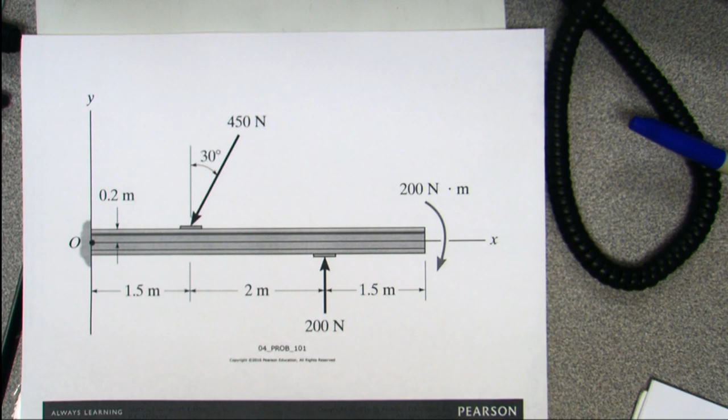Basically what we're trying to do is replace the loading system on the beam with an equivalent resultant force and a couple moment. And the couple moment that we're going to do is about point O.

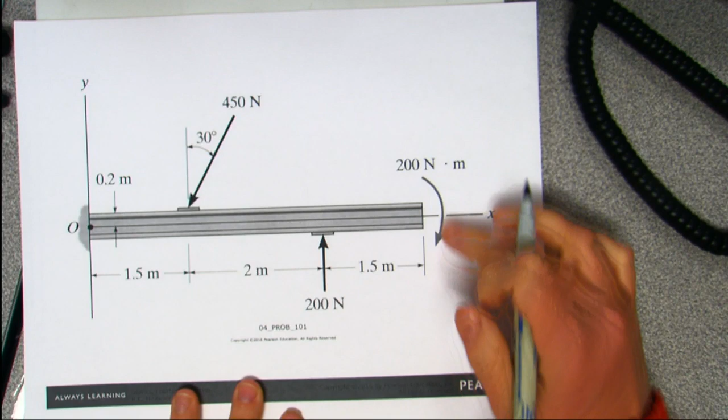Alright, so we've got a beam, and what we're going to do is replace the forces with a resultant force, and then we're going to find the moment, the couple moment, using that about point O.

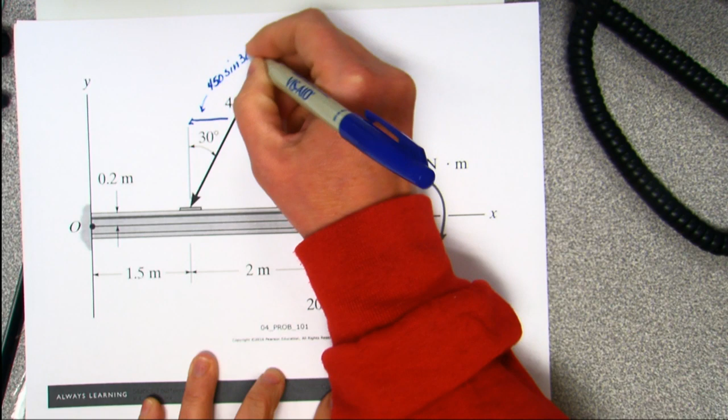So the first thing I would do is get the components of the force. This component is going to be 450 sine of 30 degrees, which equals 225 newtons. I'm going to get the y component, which is 450 cosine of 30 degrees. If I plug that into the calculator, that's going to be 389.7.

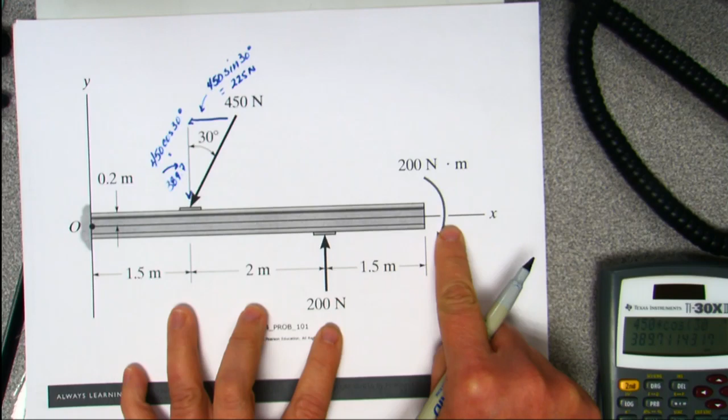This one's only in the y direction, so life is good. And then we've got this one here. So we're going to have to look at this a little differently.

So the first thing I'm going to do is sum the forces in the x direction. There's only one force in the x direction, and it's going this way. The magnitude of it is 225 newtons.

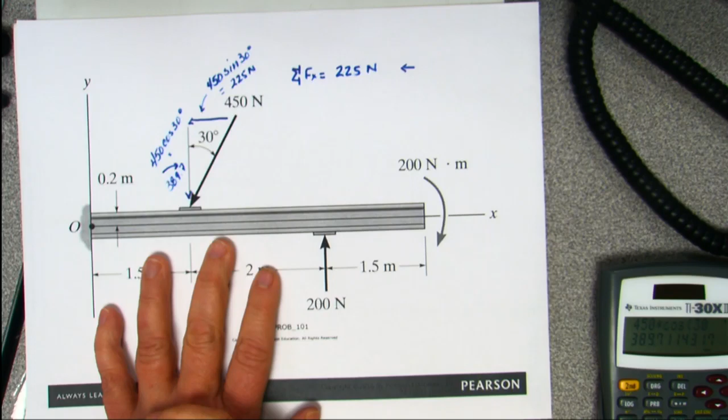The sum of the forces in the y direction, I've got 200 going up. I have 389.7 going down, which is going to give me a downward one of 189.7.

Now, I didn't do that with signs, I've done it with arrows. So if you're doing it in mastering, you got to kind of figure those pieces out.

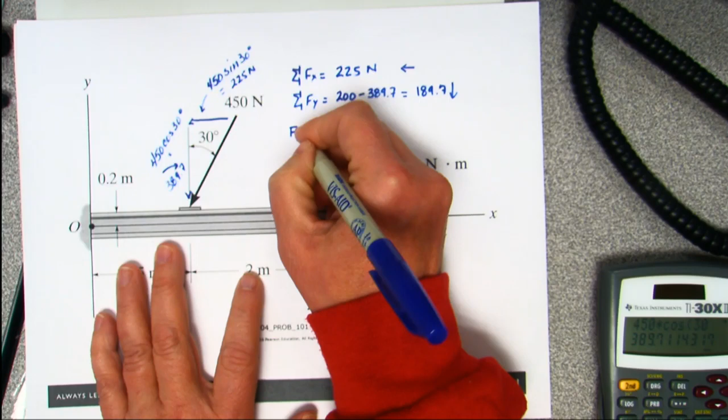Which is going to give me a resultant force of the square root of 225 squared plus 189.7 squared. And that was going to be minus, but that's okay, we've got it recorded in the right spot. It's going to give me 294 newtons.

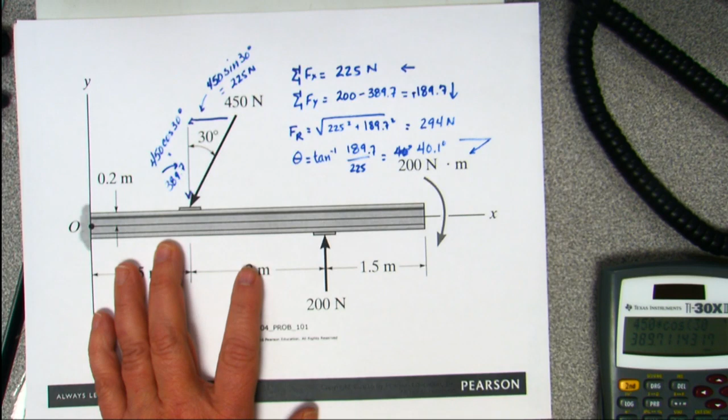And my angle for that force is just going to be the arctangent of my 189 divided by my 225, which gives me a 40.1 degree angle, and that has it going this direction. So we have the angle in there from that direction.

Everybody okay with the resultant forces on that beam, based on the forces? Good? Okay, so now if I want to do the moments...

This is the moments about point O. I've got a 4, now this is one of those things you got to catch in the picture. Look where my force is here. Okay?

So here's my moments. I've got the 450 in the y direction coming down, it's my 389.7. Okay, 389.7. And it's 1.5 away.

I'm going to put it as negative because this is going to have me go this direction, right? In the Y. This is for the Y component. It'll have me go that direction for the X.

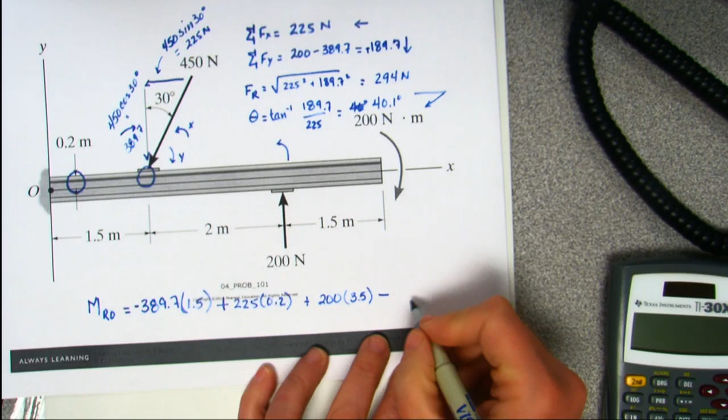This one has me going that way, so that's in the right direction. So it's going to be 200 times 3.5. Then this one's in the negative direction, and it's already a moment, and it's 200. I don't have to worry about the distance because they've already given me the moment.

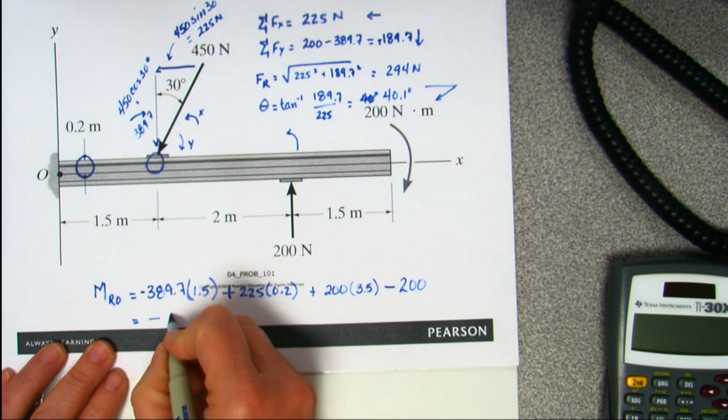If I add those together, I should get a negative 39.6 Newton meters, which I may put into the system as 39.6 and just showing it as that direction.

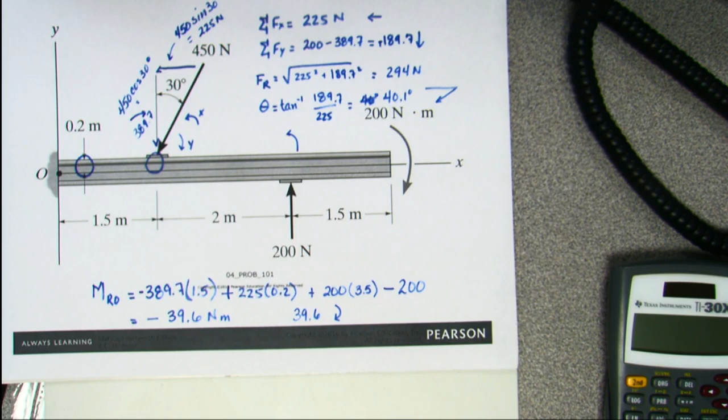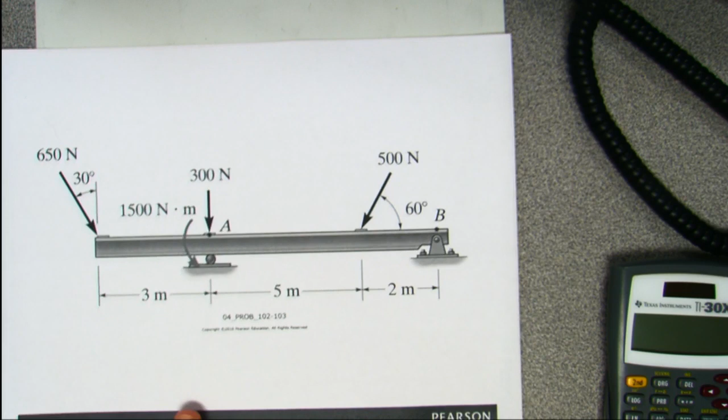Will we start distributed loads on Wednesday or Monday? Monday we're doing the presentations on fault analysis. That's right, so it's gonna be on Wednesday. And I think I've got the homework all straight, right? Distributed loads homework's not due until after spring break, is that correct? Yeah, because I think I got it all moved on Wednesday. And distributed loads won't be on the test next Friday. But doing something like this, being able to write the resultant force or the resultant moment, is likely to be on the test on Friday.

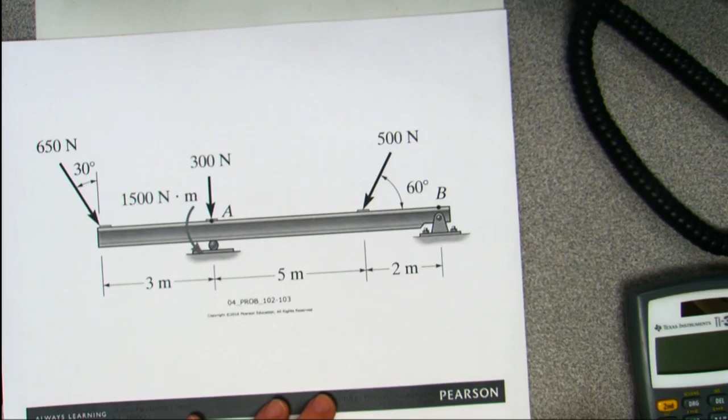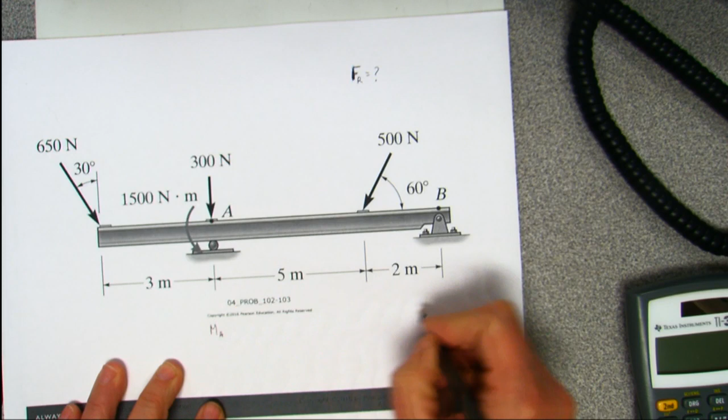So you guys want to take a stab at it and then have me work on it? So we want to find the resultant force. And then we want to find the equivalent moment, the equivalent moment about A, and we'll ultimately do it about B as well.

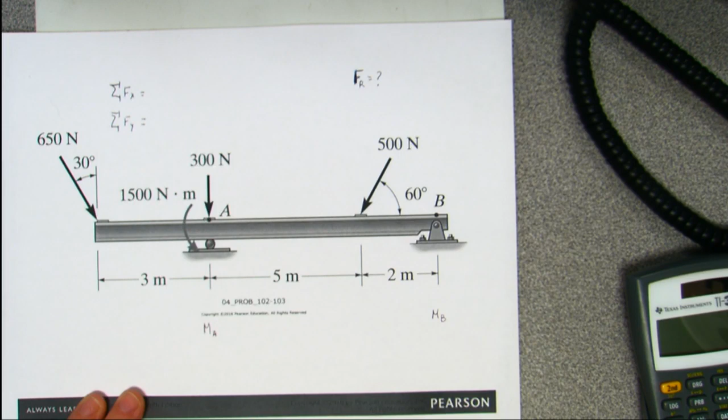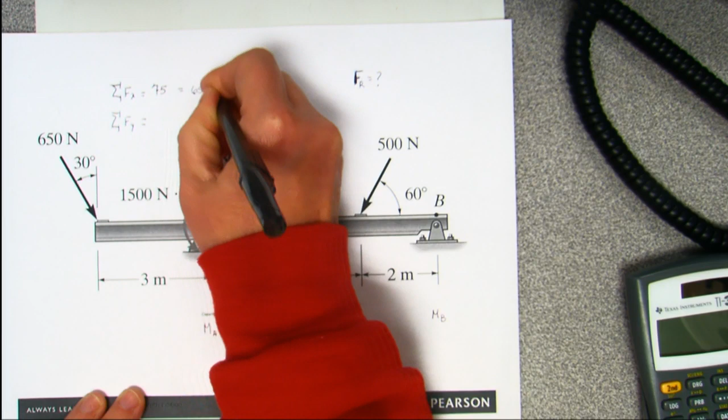And everybody got sum of the forces in the X yet? Positive? Yep, what'd you get? Positive 75. Yep. And that's coming from the 650 sine of 30 degrees, and that's that direction. And this one is that direction minus the 500 cosine of 60 degrees.

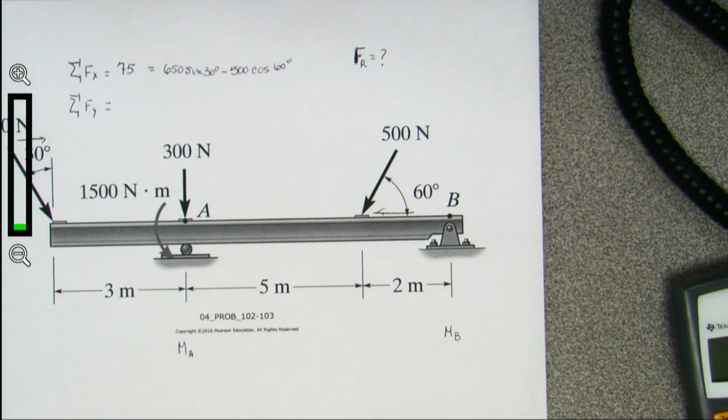Yep. Your pen is a little bit hard to read from me. Yeah, I know. But I've got either a really bad marker or I've got the marker that died. How's that, better? Yeah, that's a little bit. Yeah, I don't have a good marker.

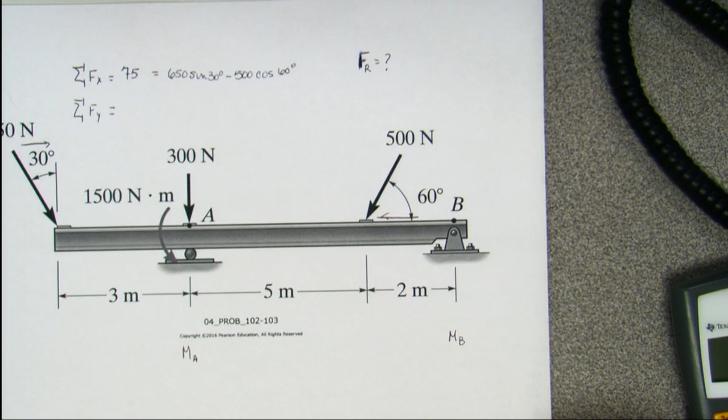I know where to go, A and B. Somebody get a Y yet? Negative 1295.9. Yep. And that comes from this: a negative 650 cosine of 30, negative 300, and a negative 500 sine of 60. Everybody good with that? I got nods. This is positive.

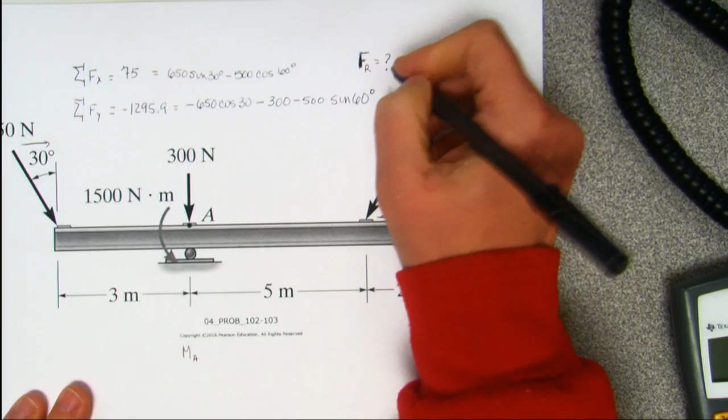So now the resultant force is pretty straightforward, right? It's just going to be the square root of 75 squared plus 1295.9 squared, which is going to work out to be 1298, or about 1.30 kilonewtons.

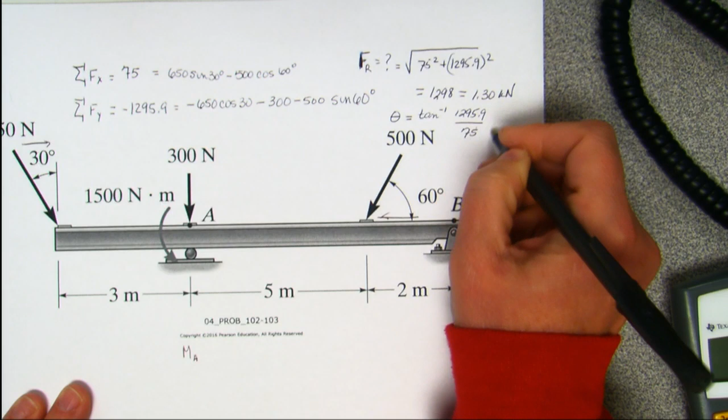Good, Kyle? Yeah, okay. And then the angle is going to end up being the 1295.9 divided by the 75, and that's going to give us an angle of 86.7 degrees, and it's going to go that direction.

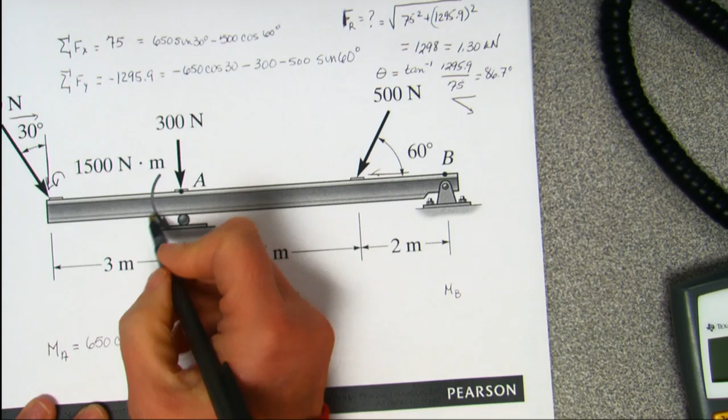So I'm going to get the 650 cosine of the 30 degrees, or is that right? 650 cosine, yeah, cosine 30 degrees, and that's 3 meters away. And that's going this direction here, so that's going to have it go in the positive direction. They give me my 1500, that's in the positive direction. And then this one, I've got it going that way, so it's going to have the negative.

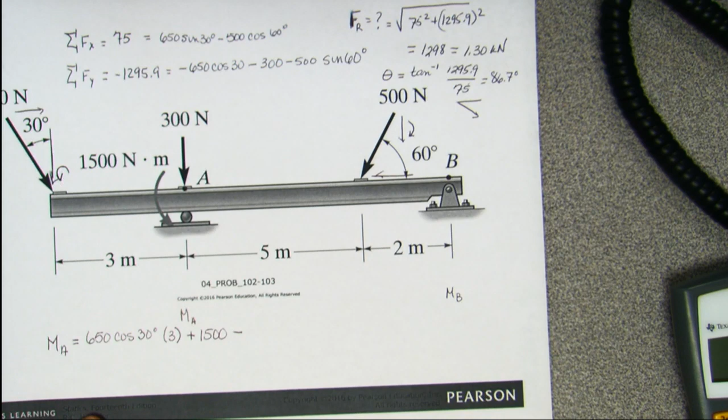I think we've got a question here. Should our 3 be negative since it's going in the— Nope, it's 3 away. We're accounting for the direction here. And then it's the negative 500 sine, yeah, sine of 60, and that's 5 away. When we plug all that in, we end up with 1023.

Now, Brandon, if I put the negative 3 in there, I'm going to end up in the opposite direction. Yeah, I was just wondering, because if we were taking the moment at A, I didn't know if we would make that negative, but I see what you're saying. Yeah, it's just, you've got to keep track of it based on how our convention is.

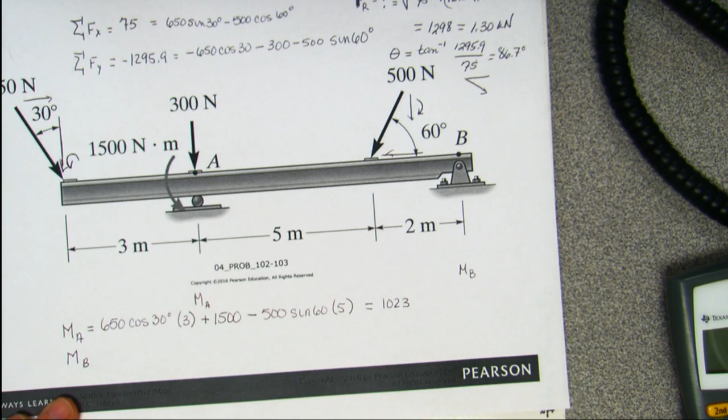And if I'm doing it about B, this now becomes positive, this one becomes positive. This room, we lose the lights, because I'm not in a position to where the motion detector is in this room is a little different.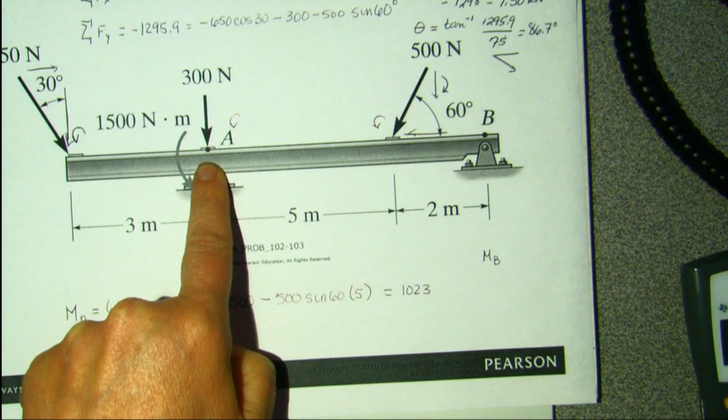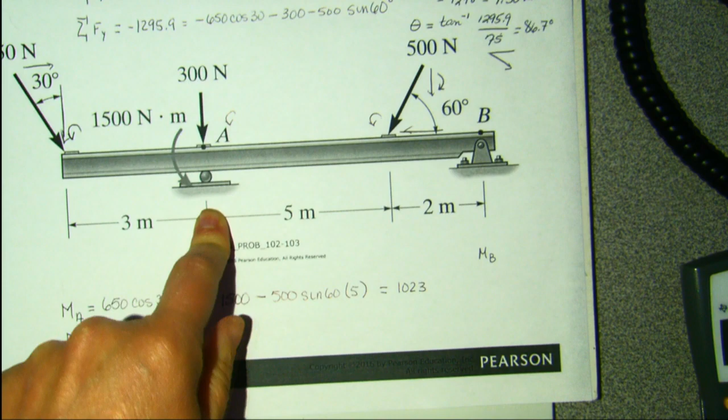So this one—does everybody see why we don't do the 300? Why don't we do the 300? Yeah, because it's on the point that you use. Yeah, D is equal to 0. It's on the point, which we use to our advantage going forward. We're going to use it to our advantage.

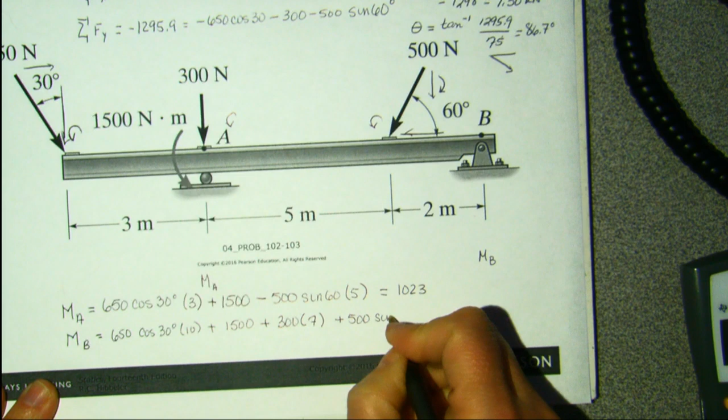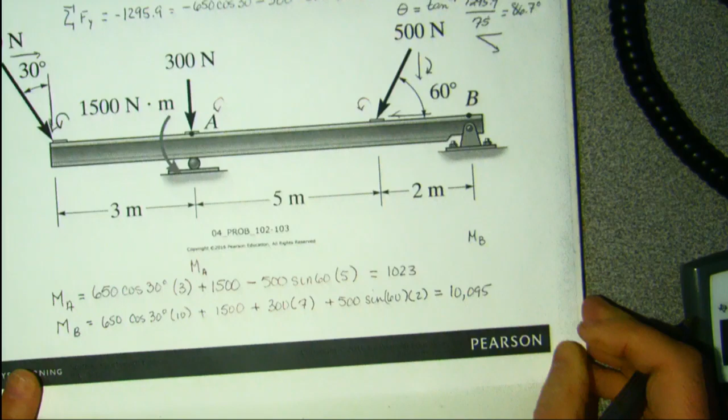So now all of these are going to be positive this time, so it's going to be 650 cosine 30, except now we got to do 3, 5, 2 is 10. We have our 1500, because that's how we represent things. We have our 300 at 7. And then we have our 500 sine 60 at 2. And that one's going to give me 10,095. So we can represent this as 1.02 kilonewtons, and we can represent this as 10.1 kilonewtons.

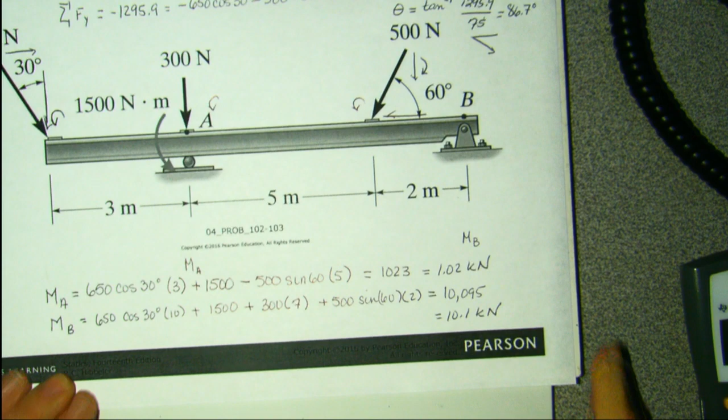This one is problem 102 and this is problem 103. But the forces are the same.

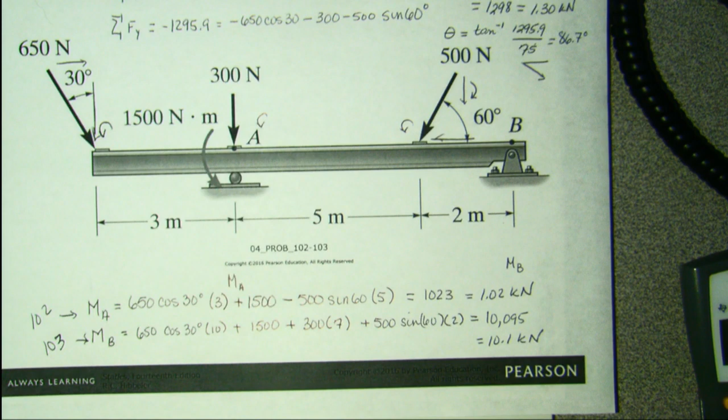Is this making a little more sense, guys?

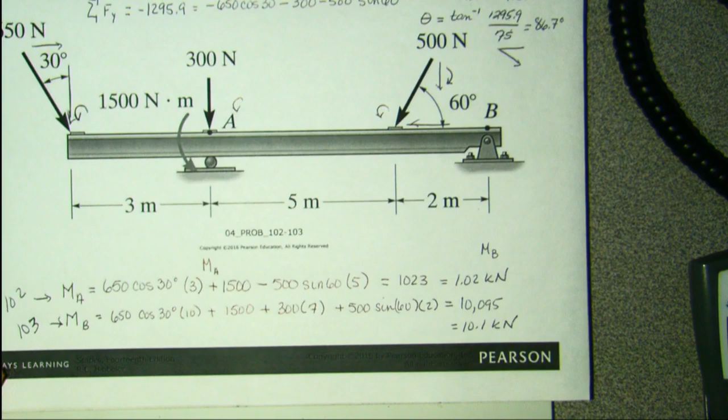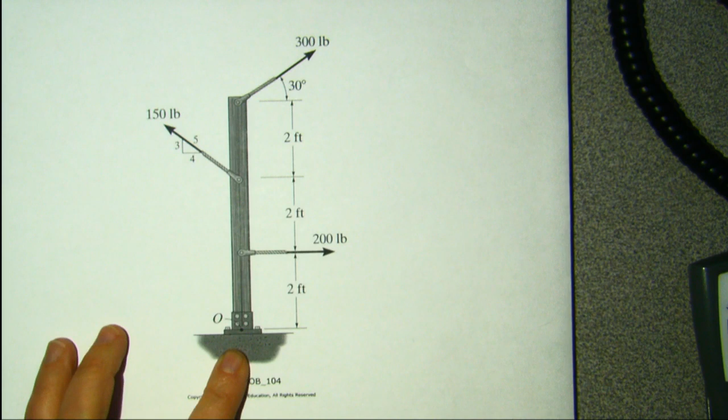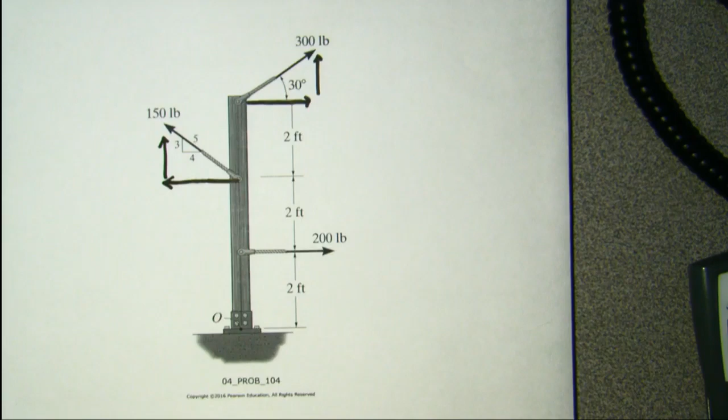So the first thing that I do is get my components. So this one's going to be 300 pounds sine 30 degrees. This is 300 pounds cosine 30 degrees.

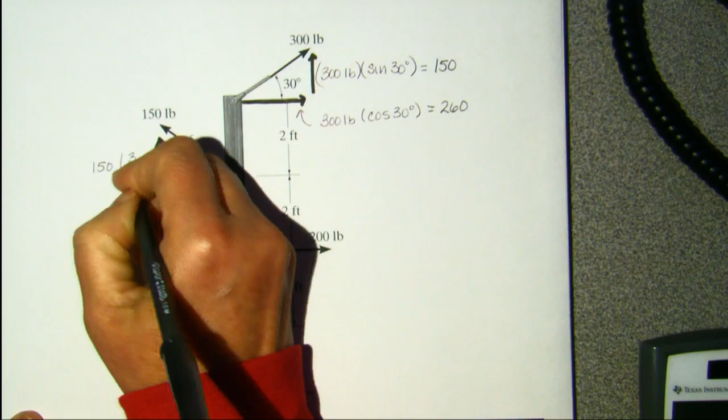This is 150. This is 260. This one's 150. And this is 150, and it's 4/5.

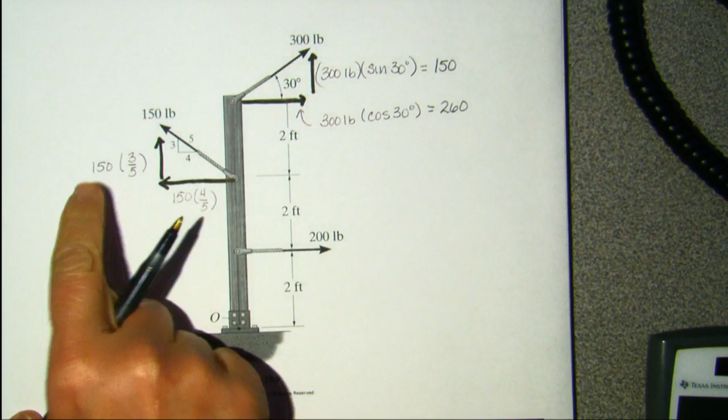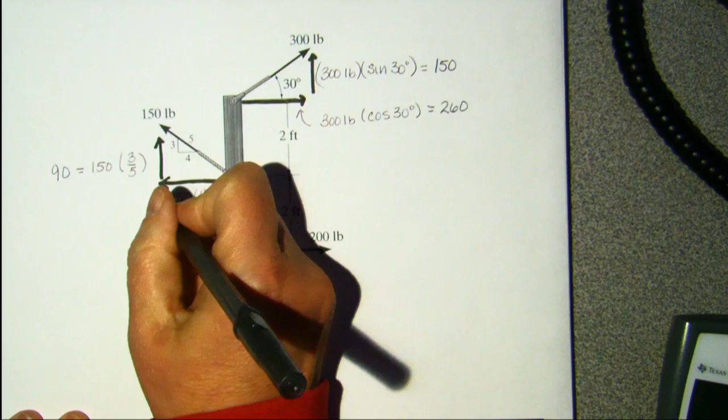Should be 9, right? So this is 90. And this is 120. And that's 200.

So the sum in the X direction is 260 plus 200 minus 120.

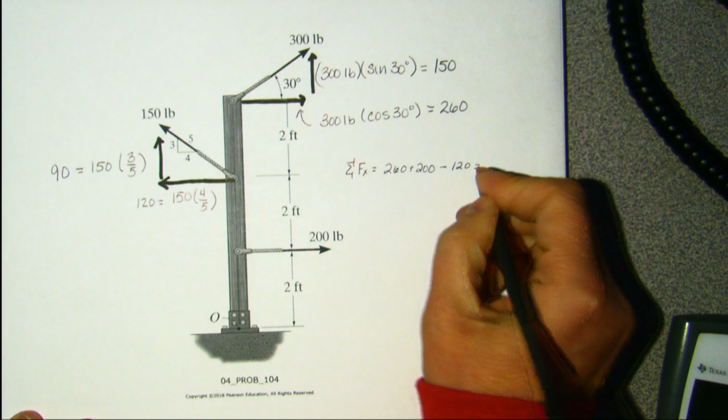Oh, I know why they're different. Okay. Excuse me, 460 minus 120 gives me 340. And that's in pounds.

Sum of the y's. That one has no y, so I don't have to mess with it. So I got 150 plus 90, 240.

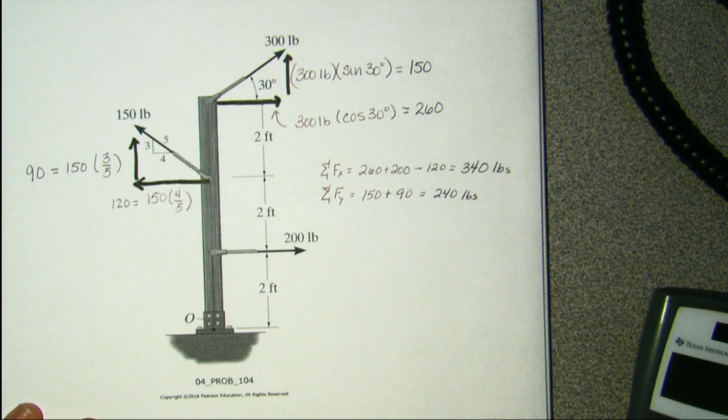So if I'm constructing this, guys, what's this post want to do? Fall over. What's the post want to do if I'm constructing it? Fall over. Which direction and how?

Yeah? It's going to want to pull up, so which bolt is likely to fail if I don't take account of it? I'm going to call this one the left bolt and this one the right bolt. Which bolt is going to fail? On what? The left bolt.

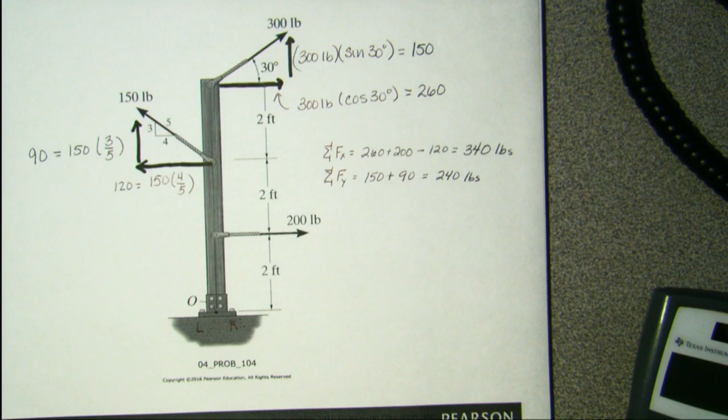Odds are - looks like there's 4. No, there's 4 on, this is a bolt here, okay, and that's a bolt there.

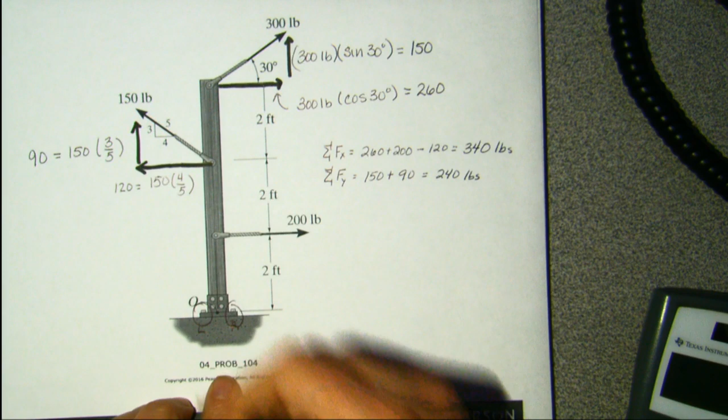Now, if the wood fails, where are we likely to see the split? If the wood fails, we're likely to see the crack right through here, right?

I mean, kind of give you a practical implication. So in order to fix that problem, let's try to prevent the problem - what do I need to do in this system?

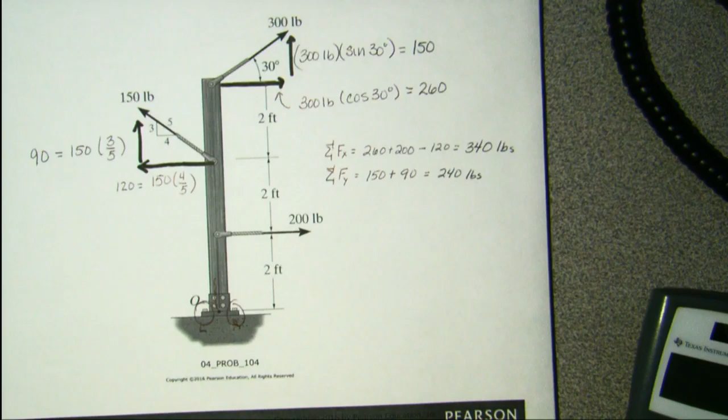This is A, B, C. What do I need to do in this system to make it not fail? Yeah, so what do I need to do?

You could increase the force in the negative X direction, like compensate. Okay, I gotta increase the force in the negative X direction, alright? What else do I gotta do?

All right, how many of you built fence? All right, so if I put in fence, what do I got to do? Go deeper - I can go deeper, okay? I can go deeper. That's why we put our fence posts in the ground, so that's one thing.

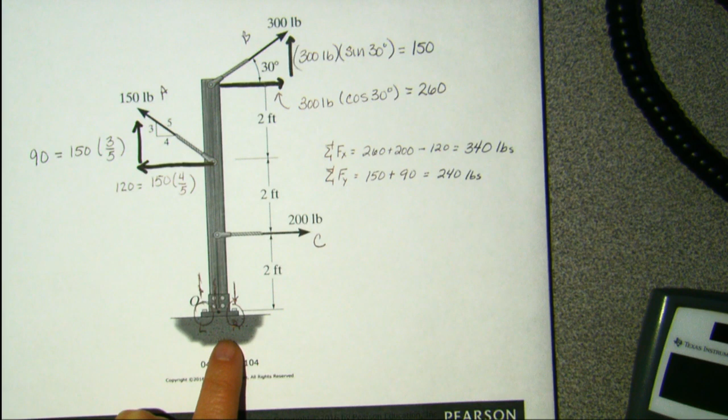Is this a corner post? Because if that's the case, you build a brace with another post. And you can build a brace, but if I've got this system right there, what am I going to change? We've already got our bolts in the ground, so what can I change based on this system right there? And put another cable in the opposite direction.

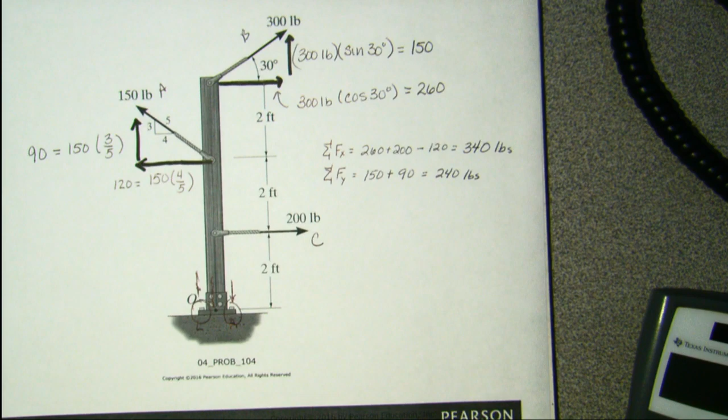I can do one of two things, right? I can either loosen these two tensions, or I can tighten that one.

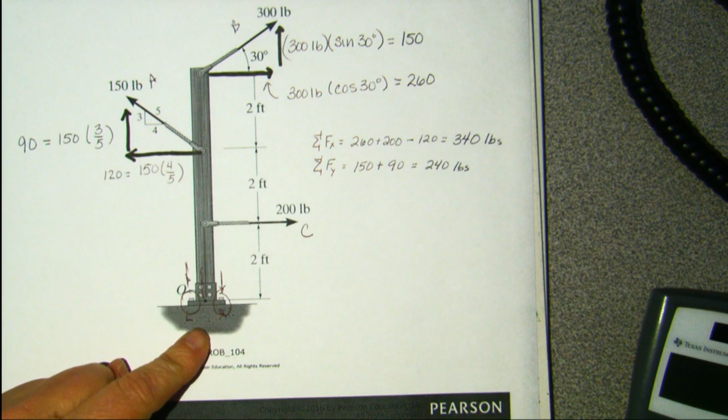Think about what you guys would do out in the field. Because I can't do anything about this, right? Can't do anything about that at all. But I gotta come along, right? That's why we put up the posts out there. We got the come along, we got our fence stretcher. So if I'm gonna do that, which one am I gonna do? We did the 150 - I'd probably go increase the tension on the 150.

If I'm going to fix the system, that's probably what I'm going to do. How much would we have to increase it by? Well, you want to do that? Okay, make this a question mark.

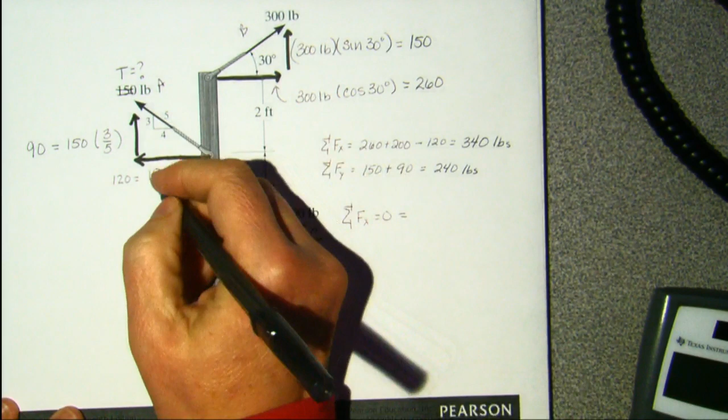We want to have the sum of the forces end up being equal to 0 in the x direction. Because I can't change y, right? Can't change y. Sum of the force in the x direction has to be there, and so that means that this is the question mark, right?

So now I've got my 260 plus 200 minus f of x, tension in the rope. F of x is going to equal 460. And we know that f of x is 4/5. It's got to equal 460. F is equal to 5 divided by 4, times 460.

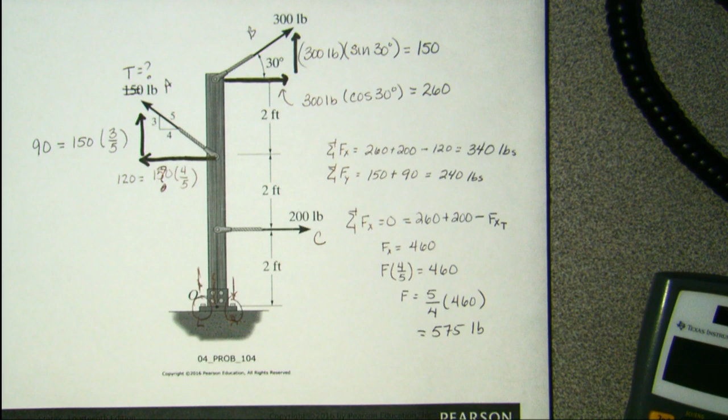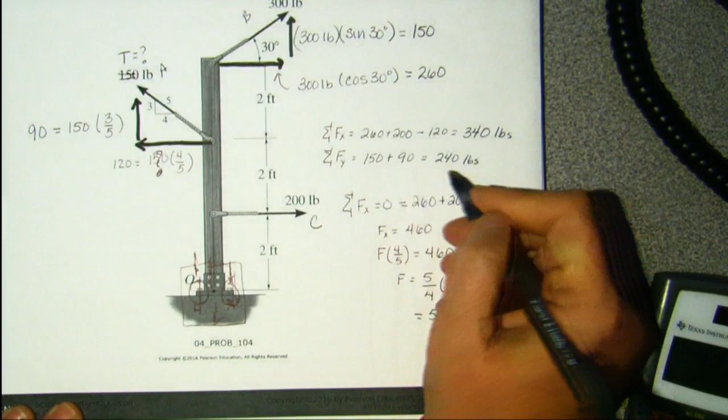Punch that into the calculator. This really needs to be 575 pounds. The other thing we got to make sure of is that this bracket, that bracket right there, it's got to counteract my y-force, except now that y-force needs to be, if that needs to be 575 pounds, that's going to be 345.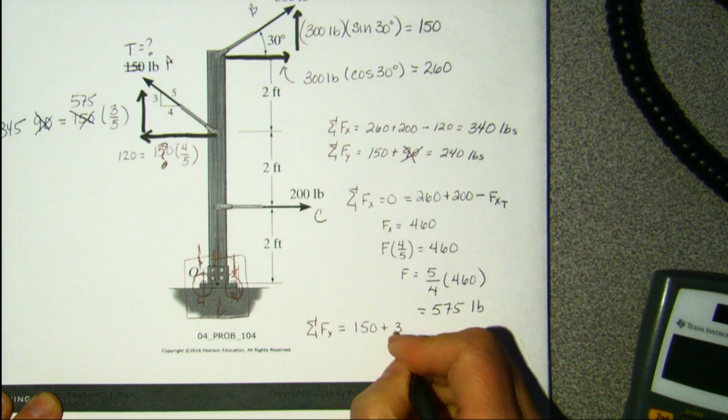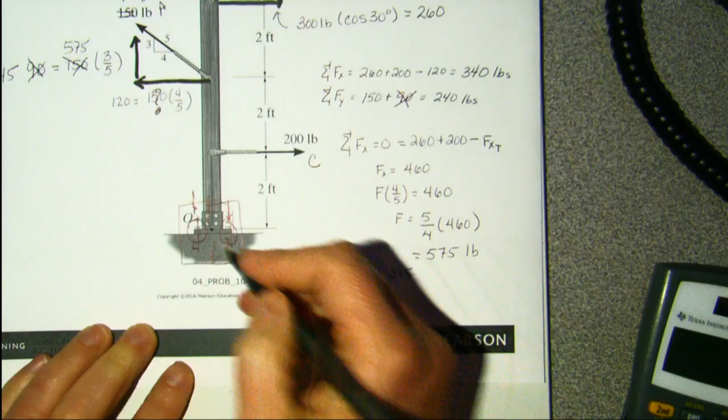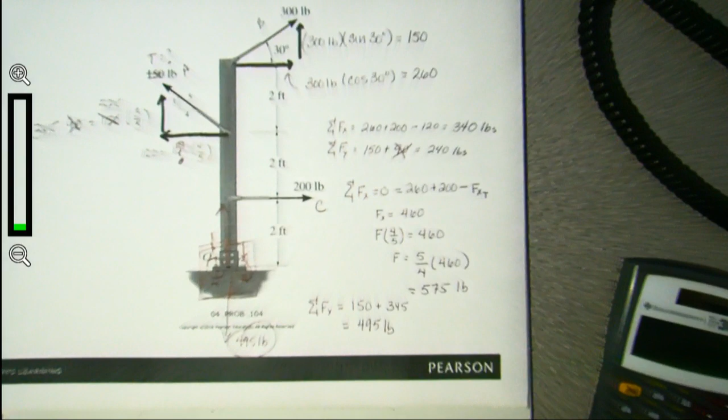We know that the sum of the forces in the y direction is going to be our 150 plus 345. We know that if I do that, this system has to be able to withstand an upward force, so it's got to counteract that upward force of 495 pounds. So if I'm doing strength of materials, I've got to make sure that this bracket is going to be able to correspond or be able to hold and not fail at 495 pounds.

Now, what else do I have to make sure about? Since you're all doing failure analysis, what do I got to deal with? Materials? The materials that you're using? Well, I got to do materials.

But we all know that if I go get a piece of wood, we assume that this piece of wood's not going to break at 500 pounds in that direction, okay? Because we all know about wood, right? Wood has grain to it, which means that if my grain is along the line like this, it's going to withstand forces different in this direction than it withstands forces in that direction. We know that fundamentally. Am I going to go buy a piece of wood that's going to be able to withstand 500 pounds in that direction?

So you're saying that's like, can you see me right now? So you're saying, is it like the grain's going this direction, or are you saying the grain's going this direction with the wood?

Well, it doesn't matter, okay? I'm going to go out and buy a piece of wood, depending on how I build my fence post, right? I want to make sure, and I can get that piece of wood, and it's going to tell me that it can withstand 500 pounds in the direction that I'm installing my wood. Is that the piece of wood I'm actually going to buy? No. Why? Because it's gonna shear. Well, it's going to shear, but the reason I'm not going to do it is because that's too close to the 500 pounds, right?

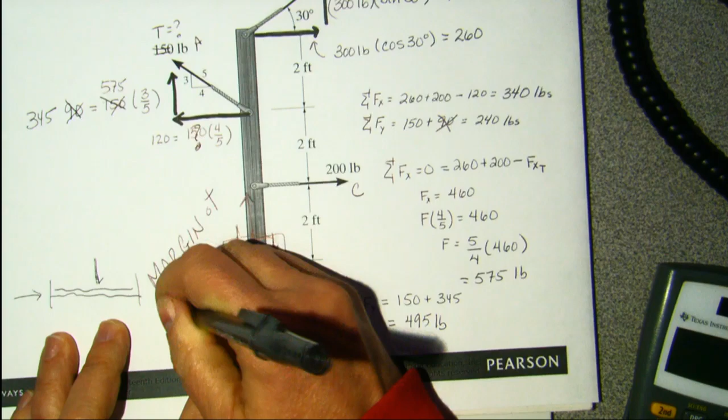What do we call that in Intro to Engineering? Anthony, what do we call it in Intro to Engineering? We're too close to what is... Margin of error. Yeah, margin of safety, yeah. It's too close. There's not gonna be the same, that. I mean, always over engineer.

All right, now I'm going to ask the question again. How many of you have put fence in? I've built the privacy fence. Now, you probably never put pen to paper when you've built the fence, right? Looks good enough. You probably not put pen to paper, but what have you guys done?

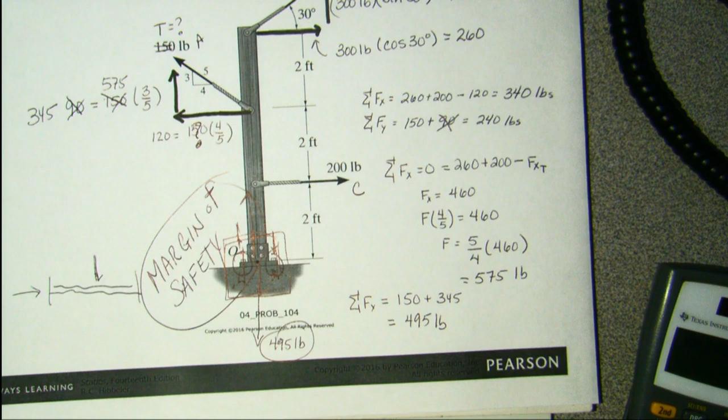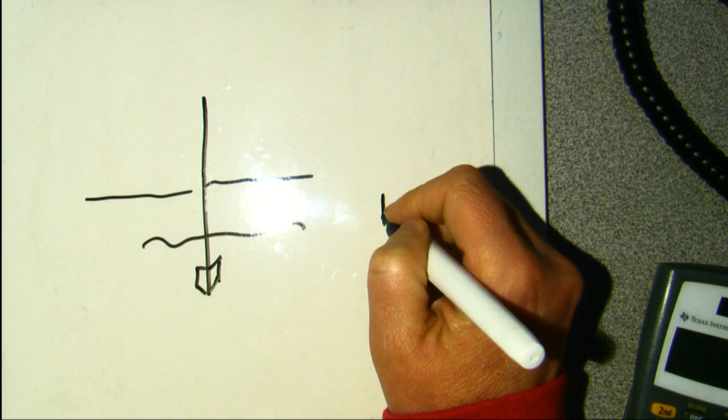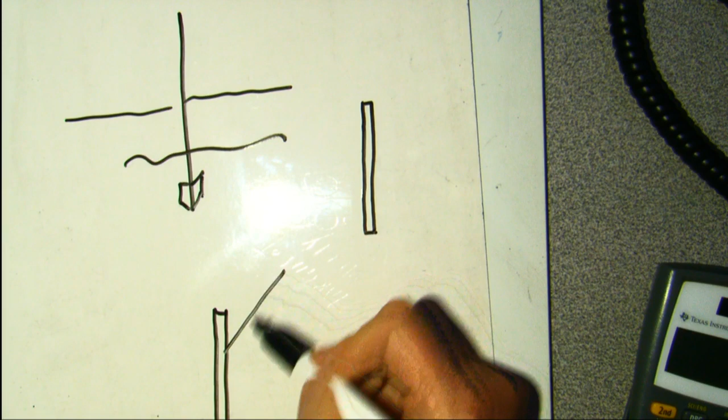So let's do a T-post. T-post has that right there, right? And we put it in so that this thing is below the ground, right? And that's also why we put in our corner post with braces. Because what's happening on our corner post? I'm going to do corner post here. We got fence going off that direction, and we got fence going off this direction, right?

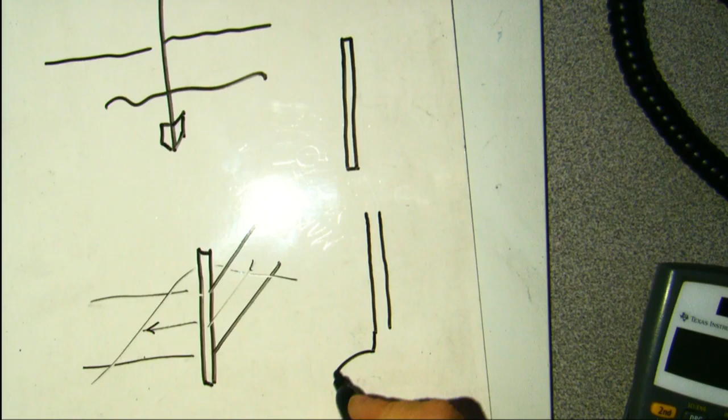So I have to make sure that those fences are out there. I have to make sure I got those corner posts to help not have it pulled that way and not have it pulled that way. And that's why, how many of you guys went on the wind farm visit? They talked about the concrete underneath those wind towers, so that they don't get them to topple.

Okay, I don't have enough time to do another problem, guys. Wouldn't the centripetal force keep them pretty stable? You're asking about the centripetal force of the blades, wouldn't that keep them pretty stable? That only accounts for the rotation around the axis up at the top. You've got blades here, that's not going to keep this stable. That's not going to keep it from toppling over. Okay, yeah, I see.

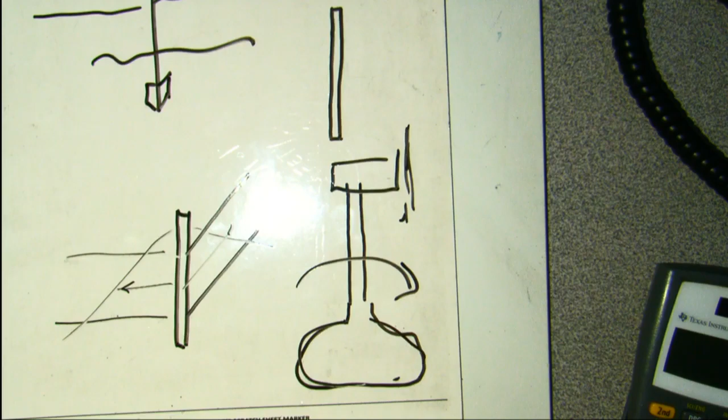No, I don't worry about it. All right, I still have to...